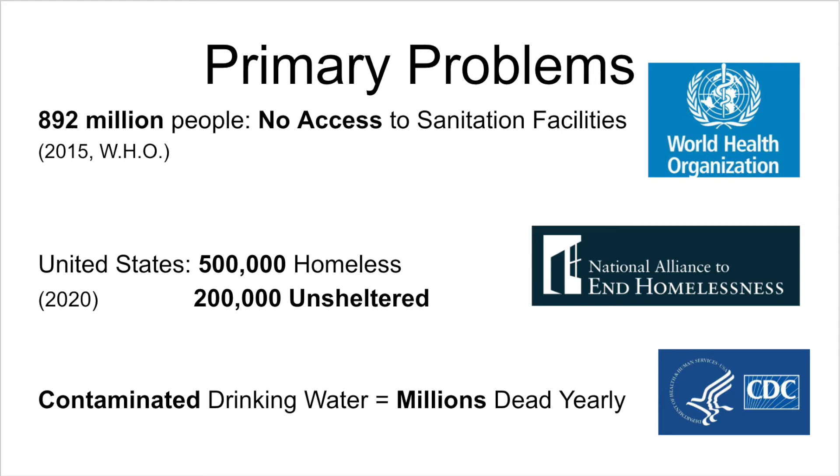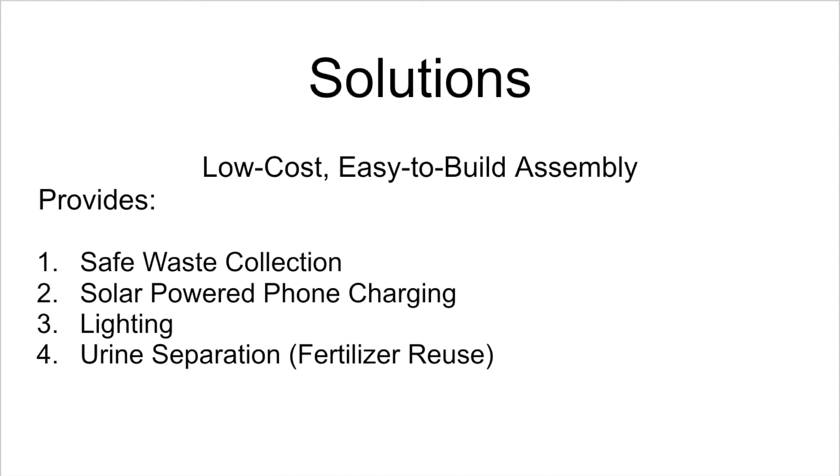A solution to this massive issue would look like a low-cost, easy-to-build assembly which provides safe waste collection, solar-powered phone charging, which is vital for homeless populations, external lighting, and urine separation to promote reuse as fertilizer.

And this is exactly what we tackled this past year with students from civil and environmental engineering, management and engineering for manufacturing, and the electrical and computer engineering departments. None of this would have been possible without our generous sponsor, Rick Davids, so we thank him first and foremost.

The primary applications of this project are centered upon underdeveloped countries, homeless communities, and even post-disaster relief. Based on the figures I mentioned earlier, this product has a theoretical reach of around 1 billion people worldwide.

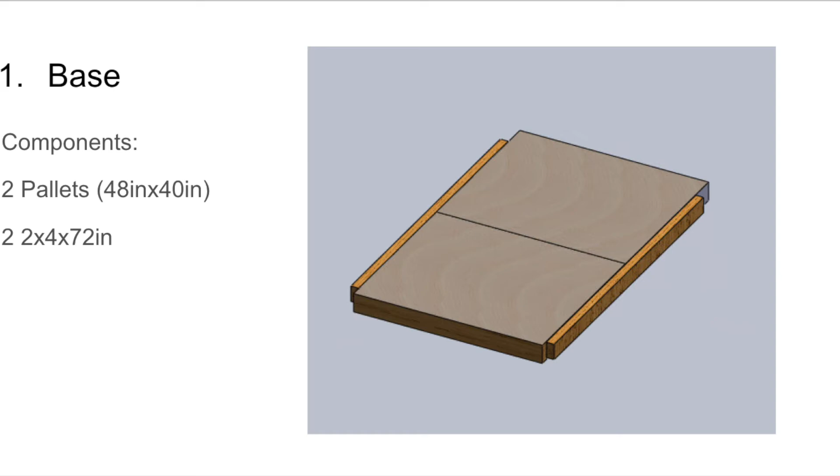This build starts with 2 pallets as the base, which was chosen as they are cheap and easy to find worldwide. 2x4s are used to secure them on either side. The walls and PVC piping will come pre-cut in the kit and work via notches that interlock in a fashion similar to Legos. Caulk or sealant can be used to ensure a tight fit.

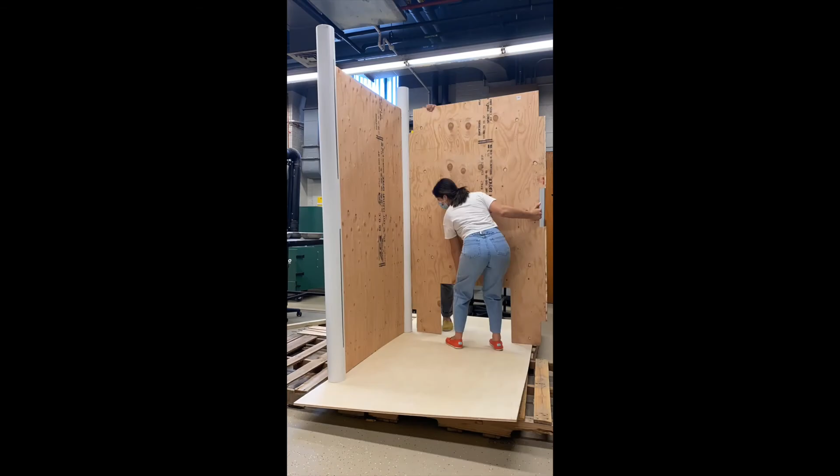The seating design allows for a typical toilet seat to be attached, but also has the stability necessary to allow for squatting if the local culture requires this.

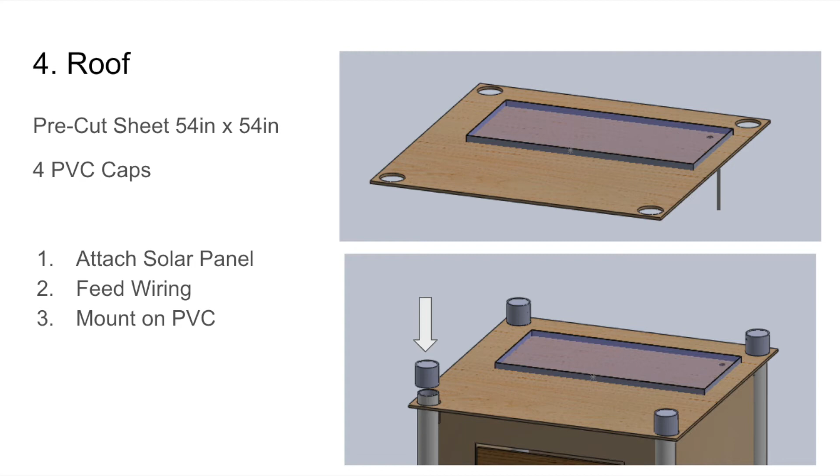The roof will host the solar panel, which will have a pre-cut hole to allow for wiring to be fed through. It will slide onto the PVC piping and be secured with PVC cap covers.

A 55-gallon drum split in 2 will act as the waste tanks, as this is readily available worldwide. A funnel and vinyl tubing will form the urine diversion system, allowing pure urine to be stored in the back tank, which will be situated outside of the structure. This allows for smell mitigation and ultimately improves user experience.

Also, a simple dilution of urine with water will provide a powerful fertilizer that often outperforms synthetic versions.

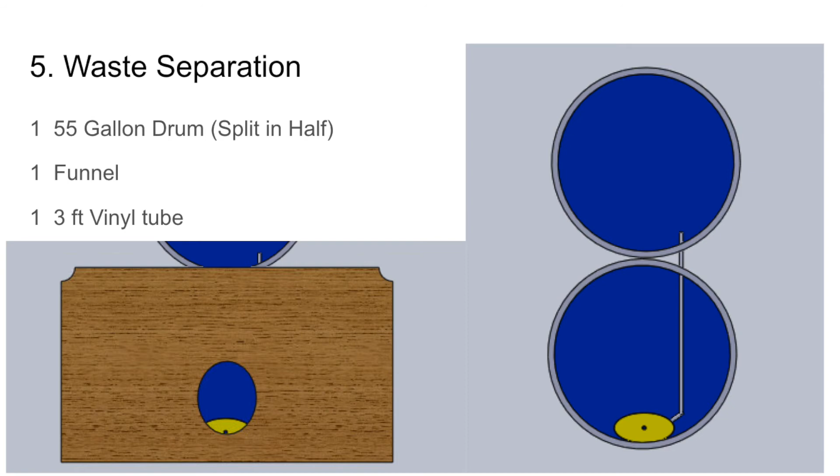The back right PVC pipe will act as housing for the wiring, connecting the solar panel to an inverter and battery stored next to the waste tank in the seating structure. From here, a universal charger will be fed up next to the wall to allow ease of use for the individual inside. Outdoor charging was considered, but posed a safety threat for those wanting to use the facility without a potential crowd of bystanders.

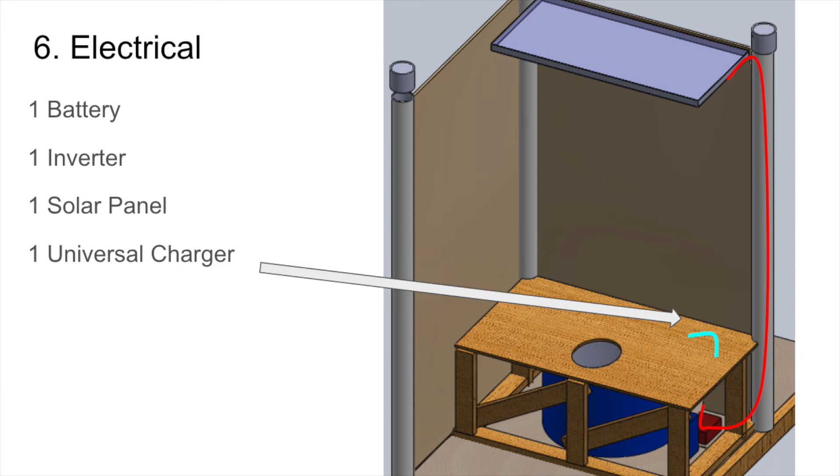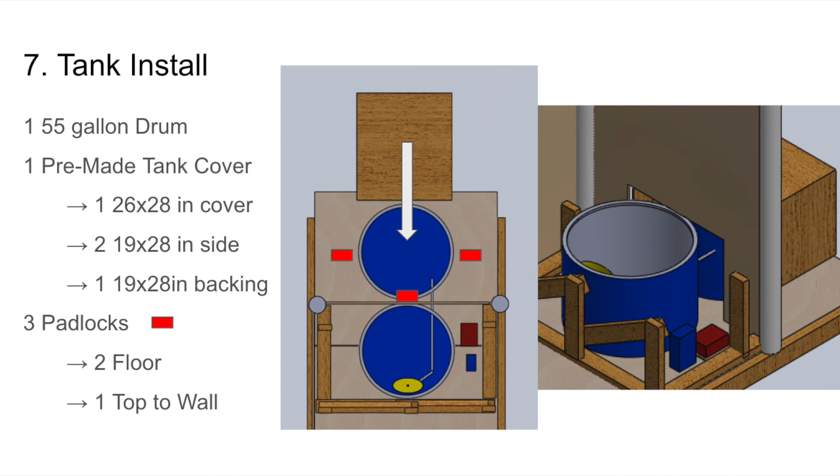The tanks will be slid in from the back and rest upon the pallets. An outer tank cover is necessary to negate public tampering and is secured with 3 padlocks as shown. The tanks can easily be removed for off-site emptying if a pumping system is not available. The removal will also give access to the electrical components, keeping them secure when the system is in use.

The door will be made from the same wood cut to form the walls. This allows costs to be cut and simplifies the building process for those who choose to do so with their own materials rather than buying a kit. 2 simple hinges and a lock will be used to finish the component.

In addition, an external light will be mounted which runs off its own smaller solar panel. This simplifies the wiring and makes the build cheaper and more accessible overall.

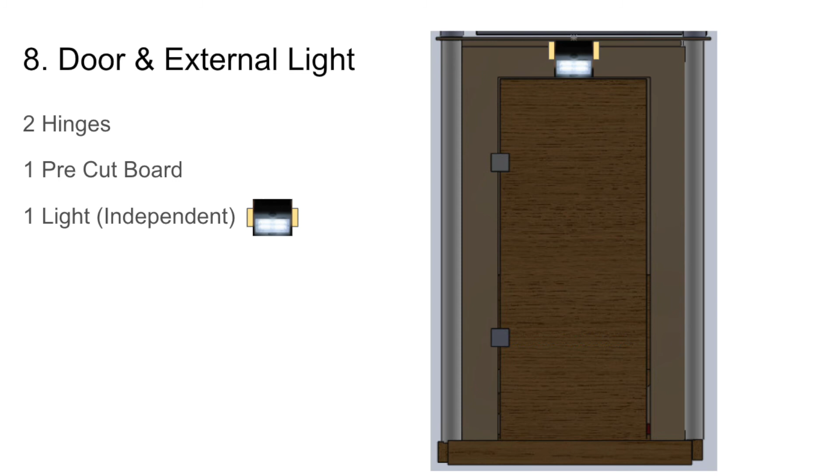To recap, open defecation has horrible consequences and is a result of many afflicted groups. We can solve this with accessible and easy-to-build assemblies that provide safe containment. This market is composed of underdeveloped communities, the homeless, and disaster relief. The Lulu toilet design has a projected cost of under $800 and a market size of over 1 billion people.